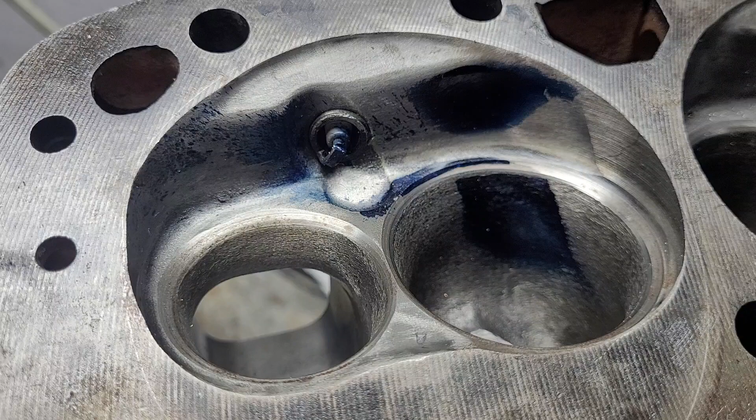Okay, take two on this, guys. For some reason, after I recorded it, it was gone. I don't know. I don't understand how.

We got a request for the Slover bow ties versus Charlie bow ties, or the old Chevelle bow ties. Unfortunately, both of the Slover bow ties did have some Charlie work done to them. You can see on the exhaust, around the bowl, I have some burr action.

Further down in the port, you see that mirror finish? That is Slover porting. As far as the intake bowl, that grinding is a minimum of 8 years old.

It's gone over with a cartridge roll. It looks pretty good. As far as liquid flow, it does a pretty decent job. Very, very similar to mine. Even though I have my chamber kicked out a little bit more, it looks pretty good.

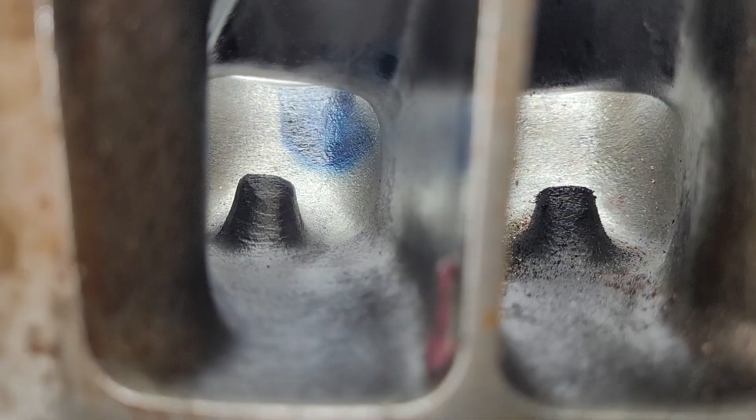Okay, you can see down the Slover bow tie where the liquid is. One thing I did notice about the Slover port is it's not quite as wide at the short side radius on the roof and the short side radius, it's a little narrower. It also poured a little bit smaller. These poured exactly 200 cc's.

Mine were 204. Okay, you see a little bit of clay by the bolt hole because it was broken through. I have the same thing on mine. The pinch is almost identical on both heads.

Okay, these are the Chevelle bow ties. They have a different shaped bowl. They are narrower in the mid-range, and then the roof gets wider.

The Slover ones are more like a triangle. They get narrower and narrower as they go down. Okay, because the roof isn't nearly as wide. So that's an important point. That's where those 4 cc's come out of. That and the width and the short side radius.

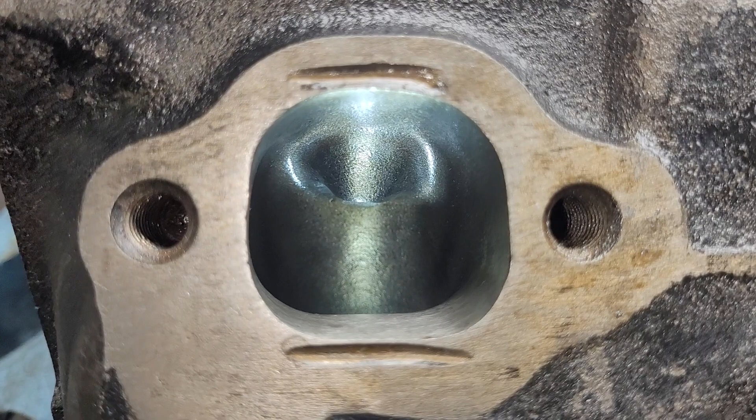As a comparison shot, these are my Chevelle bow ties. And they're shiny because I had to hit this with a little WD-40. Okay, the exhausts are radically different. And we're going to discuss the difference in the design quite a bit.

Now, these are my Chevelle bow ties. The shape at the flange is almost exactly stock. The way I usually like to do exhausts, I don't like them bigger than stock. I try to keep them relatively small.

But I take out way more width-wise on the port around the guide boss, where it's restricted by the valve stem. I give it more area than the Slover bow ties. Let's take a look at the Slovers.

Okay, the Slover bow ties have a completely different shape. They're an upside down D, basically. So the roof was raised considerably and made a lot wider. They also are much bigger. They're 65 cc's, and my Chevelle bow ties are 61.5.

So I remember when I saw these at the swap meet, I saw that exhaust shape, and I think there was an Australian manufacturer back then that was doing like an upside down D exhaust that were pro-something. But that company had a really good reputation. So I saw these and I'm like, well, maybe this guy knows something I don't. And I picked them up.

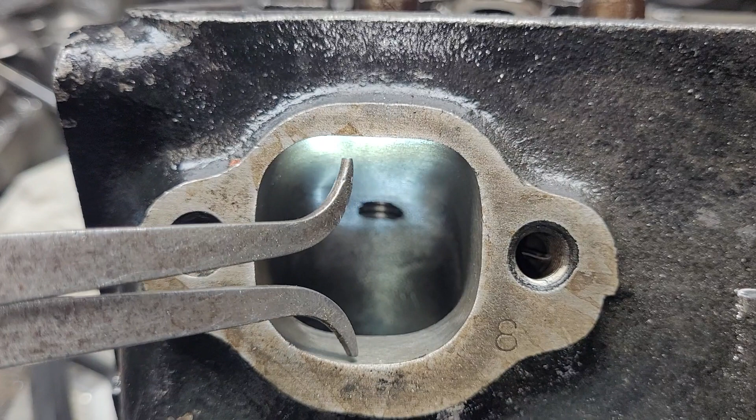That's how much taller it is. So the roof has been raised, and if you take a look at the floor, let's compare that floor to my old Chevelle heads.

Okay, that shape is dead stock. It's flat until it starts to curve into the vertical walls. I did not change that a bit. That's just the way GM cast it.

So what they wound up doing was they actually lowered the center of that floor, which I don't agree with, because as it is, that's the low speed area, and you don't want to make a low speed area bigger - you want to make it smaller, because you can cause a lot of reversion right there.

In fact, if you study fluid dynamics, if you have real high speed air on the top, which this is designed to do - that's why it's got all that area on the top - the real slow moving air could actually go back into the port. It doesn't sound right, but it's true.

So I think these were done like an oval track design. I think they were designed for higher RPM sustained use, and one of them actually had a crack and was welded, because the guide failed, so it couldn't get rid of the heat. It was probably sustained racing, and it couldn't get rid of the heat, and then it cracked and was welded. Whoever welded it did a really nice job - I don't have any problem with the way it was welded at all.

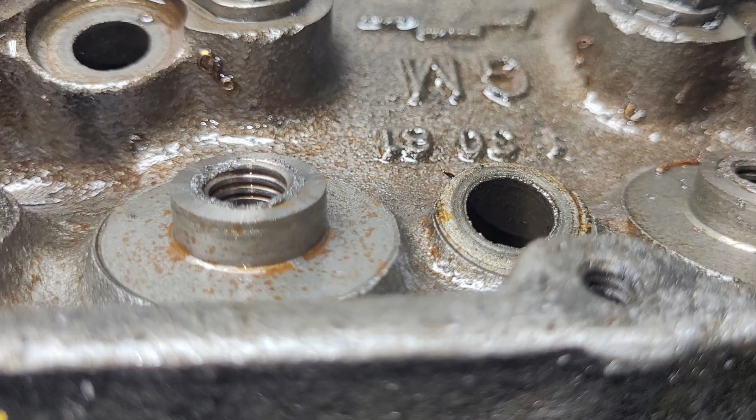Okay, you can see these actually have got - I put bronze in these. I did have problems with removing two of those spiral bronze guides, and I did break - I broke two of these off, and you can tell, they're threaded, so they're super thin. So when I was machining them out to put the thin wall bronze in there, they both snapped off. The rest of them are good to go, so there's no problem.

I don't really - I'll have to bring that to the machine shop, and you can put some cast iron guides in.

Okay, the Slover short side radius is relatively tall. It looks pretty good. It is cartridge rolled. Sorry, that's a light burr. I do believe it was cartridge rolled when I flowed it, though.

These have had - I think I did, did I do all of these? No, I only did that one port on these. Okay, the other head has had more work done to it.

Sorry, guys. All right, tough to see, but it does have a little bit different shape. This is laid back - it looks like a touch more. But due to the other head having welding on it, I'm going to leave those a little bit higher, I think.

When I do work on those exhaust ports, I'm going to work more on the width of the port than anything else, because they're already big. So I'm going to try to make the efficiency the best I can for what we've got.

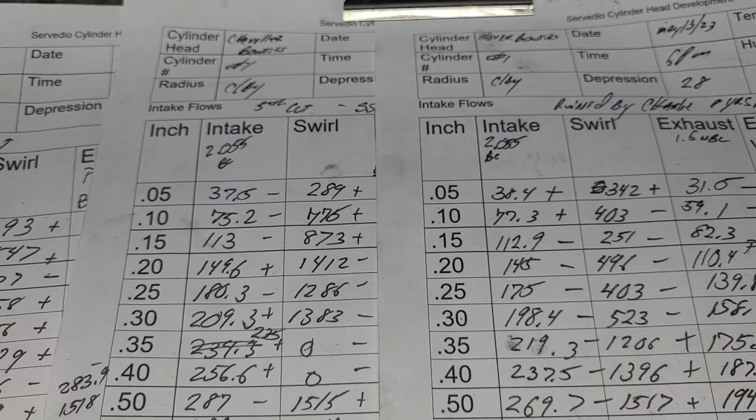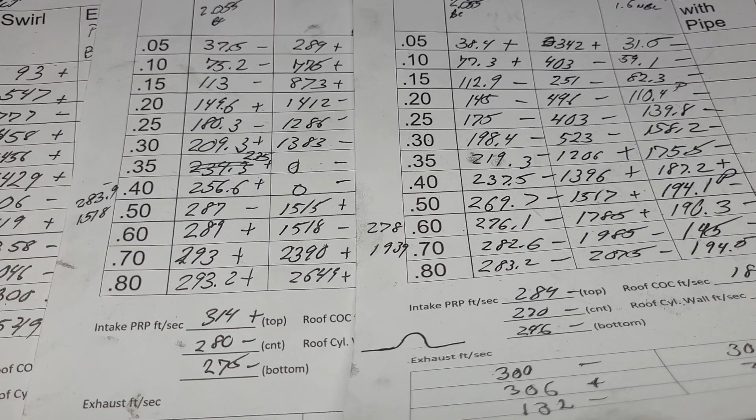Okay, on the left is the Chevelle Bowtie - that's the 5th cut on that. So 5th cut, I only did the intake because I was done with the exhaust on the 4th cut. I was happy with it.

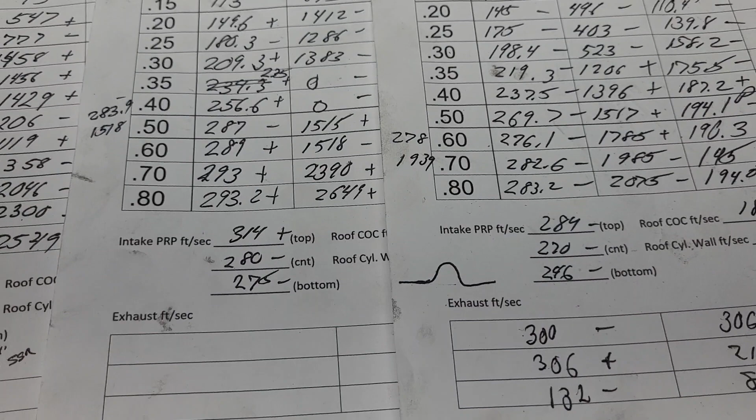And the 5th cut, all I did is try to even out the speeds on the short side radius, because I wasn't happy with how fast the short side radius was in that one spot. It's still quite fast in one spot.

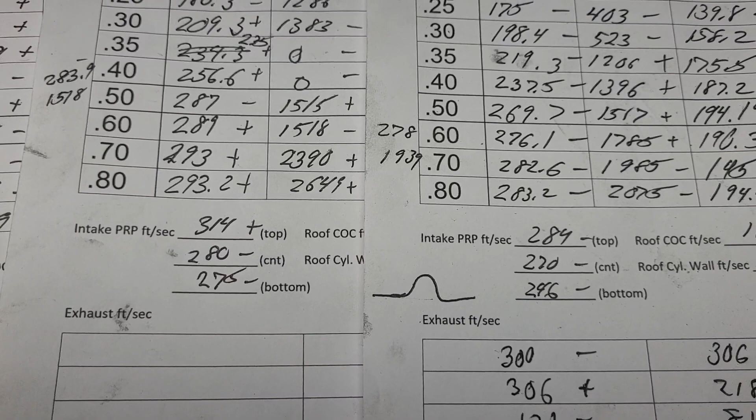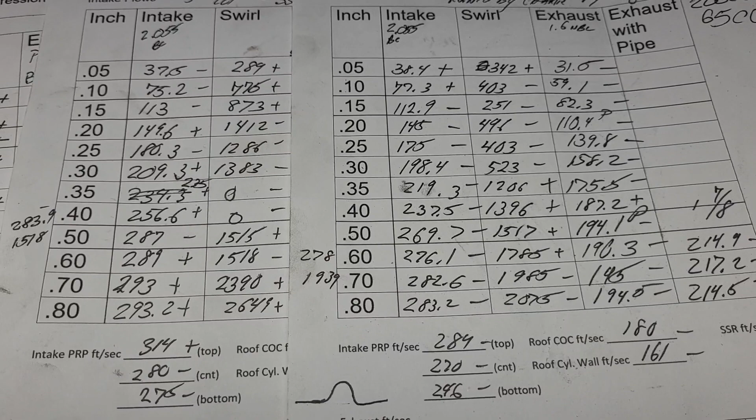Now that's one thing that I noticed, and sorry if I repeat myself, guys - that's what happens when you do 2 videos the same. The Slover port definitely isn't as wide across the top of the bowl, and the short side radius width is definitely less. I think I already mentioned that. But let's see how we did.

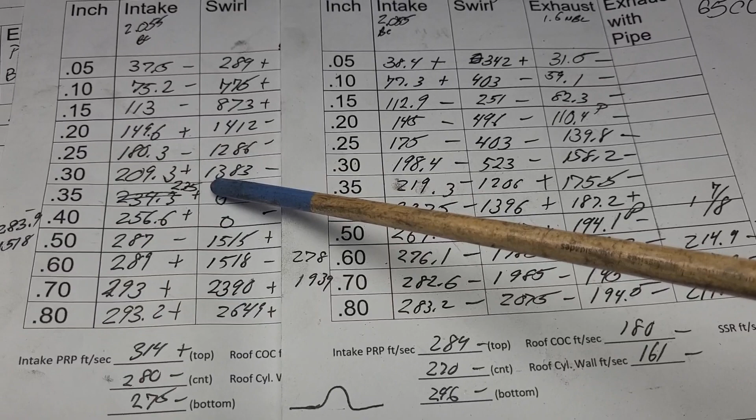Now these pluses and minuses here are in reference to these flows. Okay, so: Chevelle, Slover, ported - ruined by Charlie.

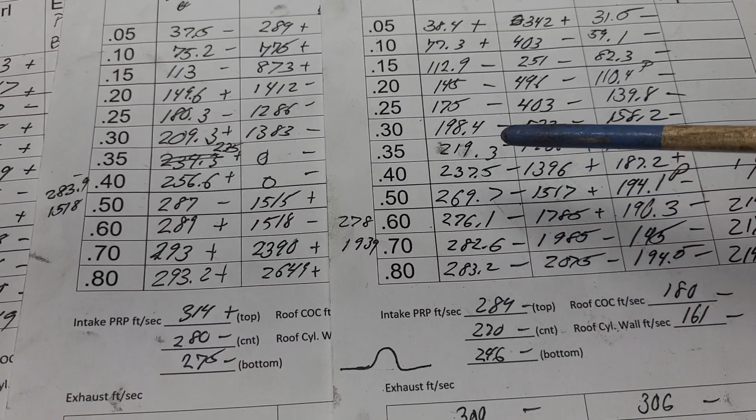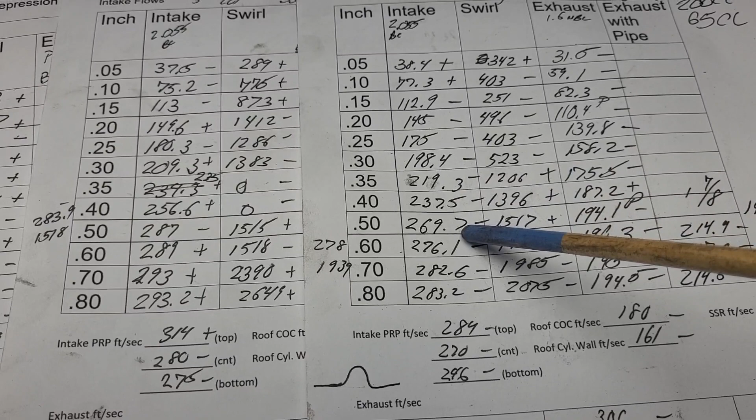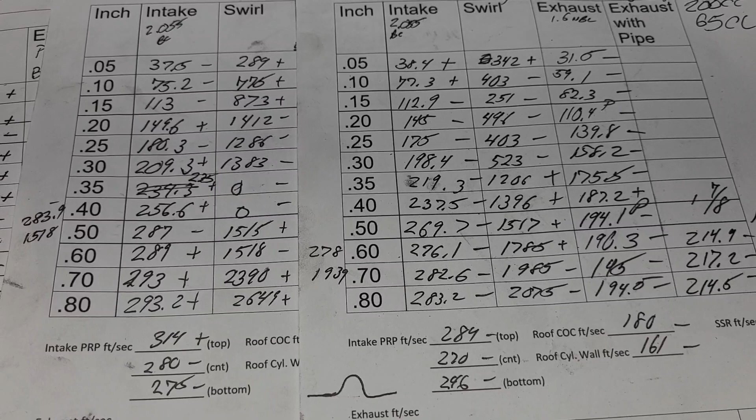Okay, plus, minus, minus, minus, minus. Now, not busting on Slover at all - if these were oval track heads, remember, they only flow about 230 stock, so a 40 CFM gain is huge. So they went up from about 185 cc to 200 and got 40 CFM extra flow. Not bad at all.

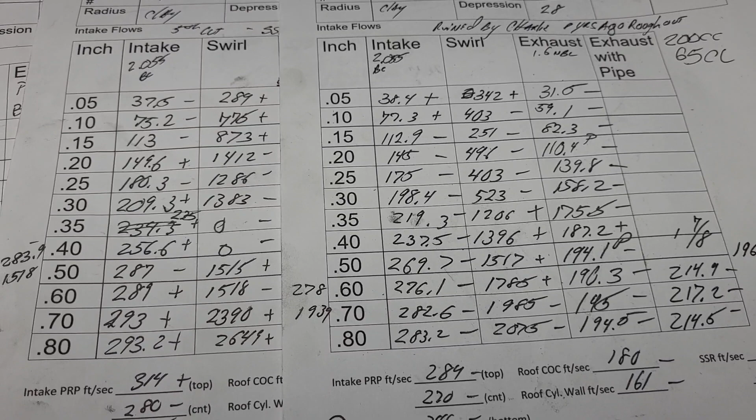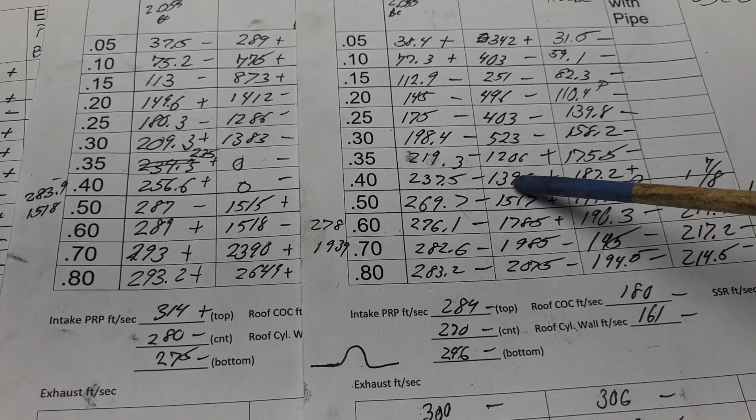Let's take a look at the swirl here. Plus, minus, minus, minus, plus, plus, plus, minus, minus, minus. The swirl is still pretty good, right around the area where you'd be racing, fine. Not really a problem.

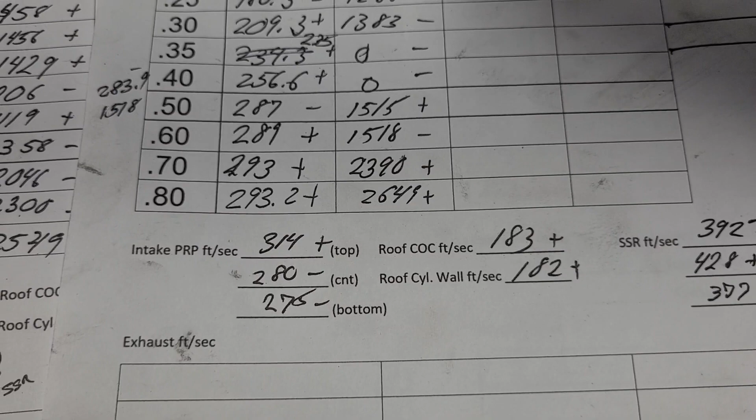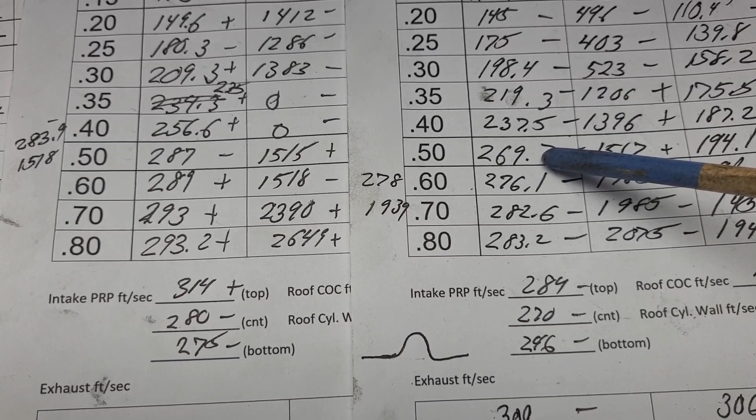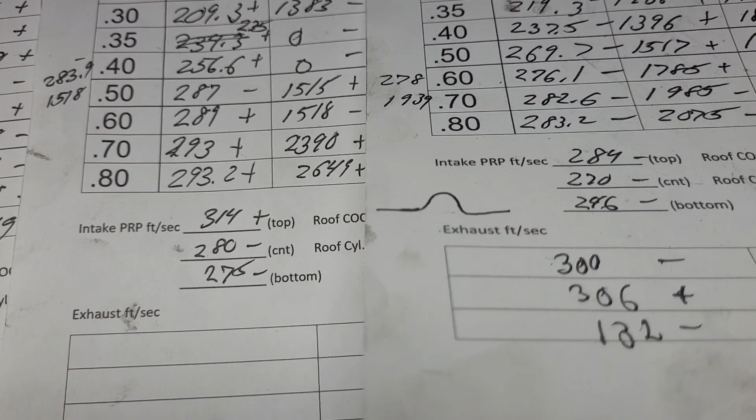Let's take a look at the air speeds on the intake. Push rod pinch was measured at 0.567, minus, minus, minus, because it flows a little bit less. It flows 278, this is 283.9. The pinch, I said, was almost identical in size. Roof, 183, 182. A little bit slower on the cylinder wall side.

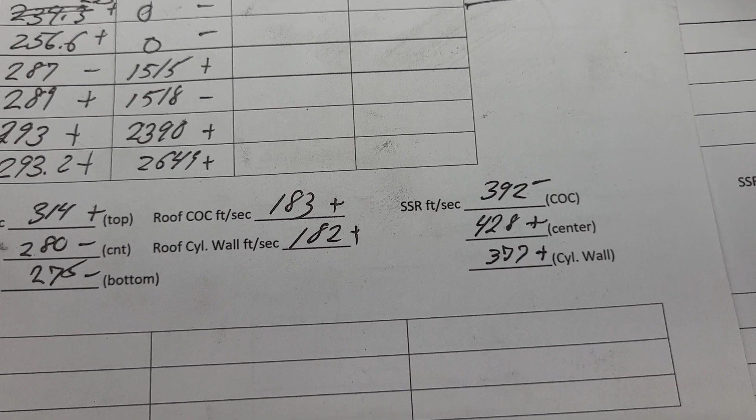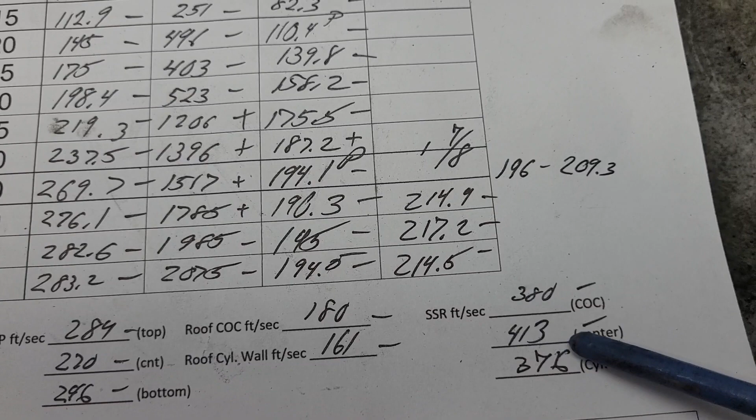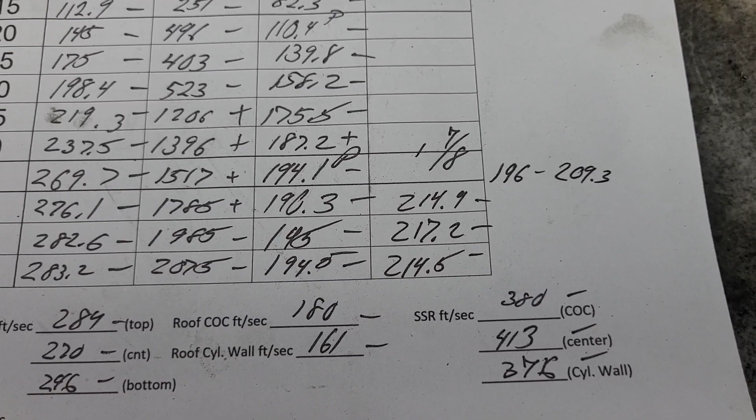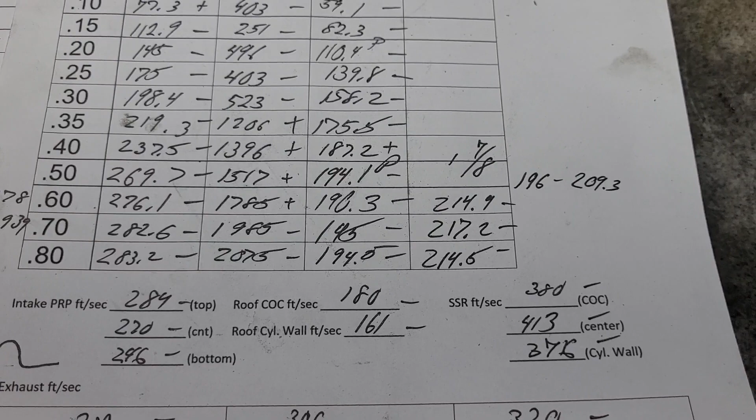Short side radius numbers. Minus, minus, minus - now think about that. It's a narrower short side radius. They're almost identical in height, so the only thing really different, the short side radius on the intakes, is the width. This is definitely a narrower short side radius. You would think the speeds would be up more, but it doesn't always work that way, right? Because you make it wider, it makes more air want to go around it, take the shortest path, increases the speeds. So you have to test, right?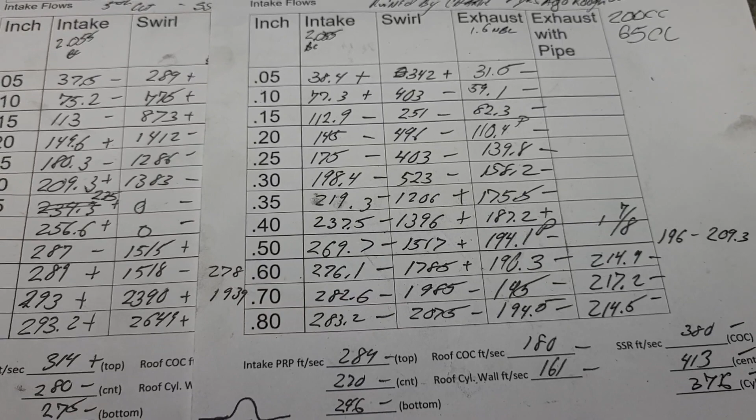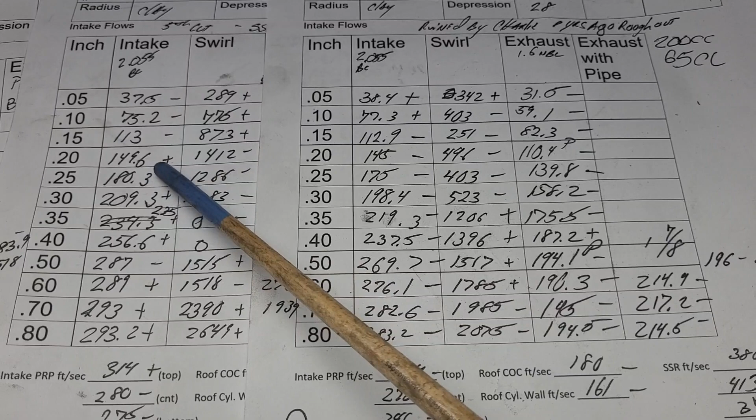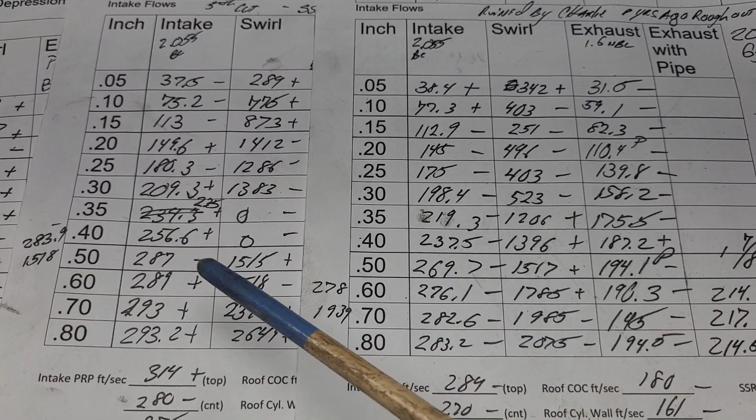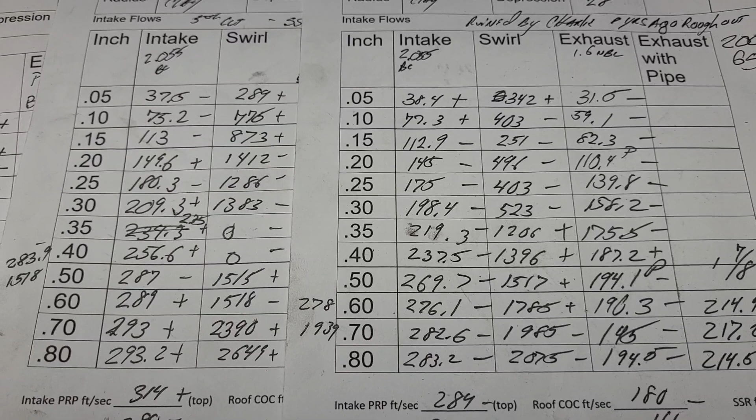Okay, let's take a look. We should take a look at a couple flows. At 200, we're 149.6, 145, close. At 300, we're 209.3, 198.4. At 500, 287, 269, and we top out at 293, 282. 282 is not a bad number - that's all these flowed before with the 90s porting. That's all they flowed, was around 280, 282. And like I said, these were probably oval track, so you know it could have quite a bit of lift on them.

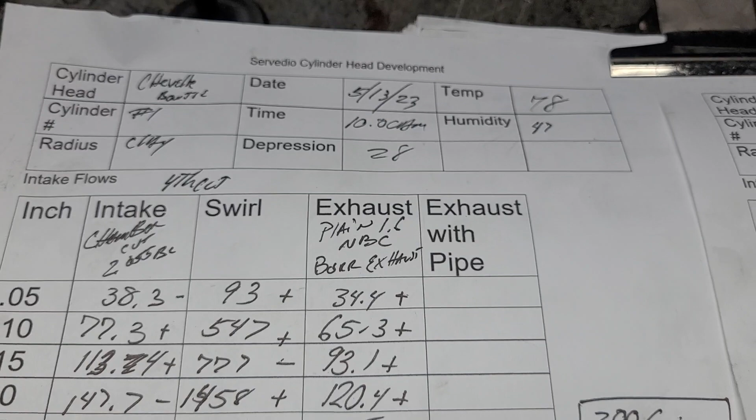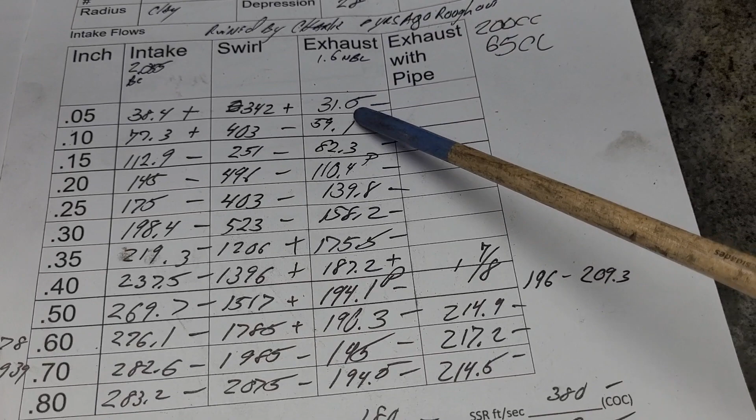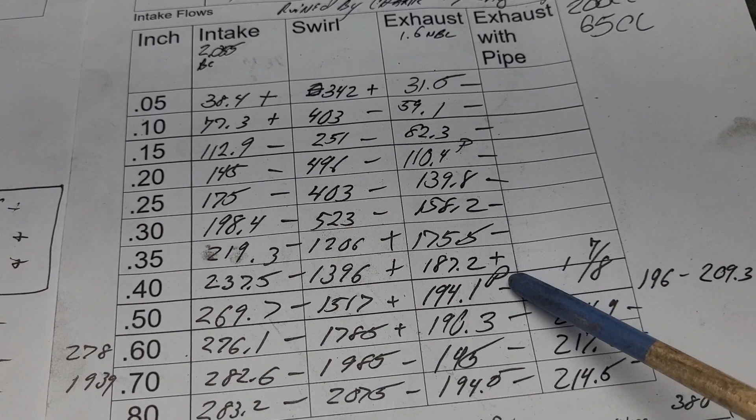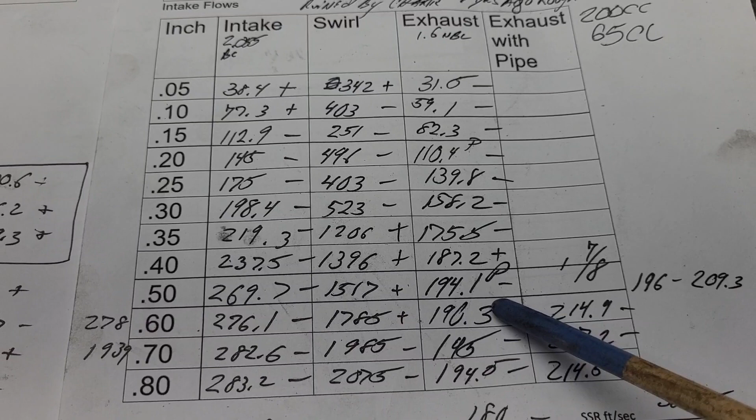Okay, this page is Chevelle Bowtie 4th cut, because that's when I finished up my development on the exhaust flow. So we're going to compare these flows to these flows - these pluses and minuses here are in reference to these. How do we do? Minus, minus, minus, minus, minus. Plus, minus with a P, pulsating - pulsating's not good. It's literally a sound on the bench where you can hear it's starting to separate.

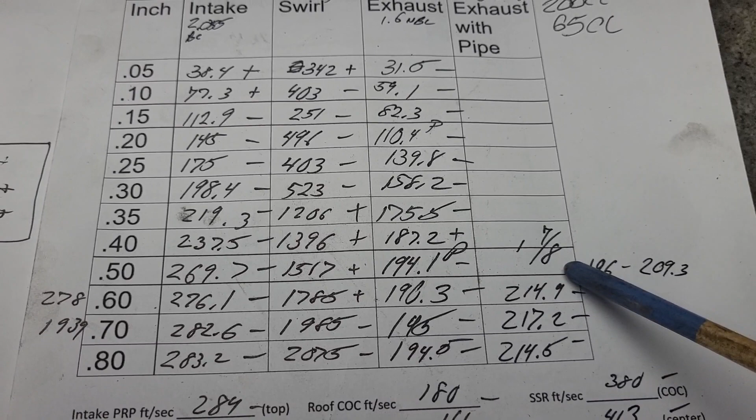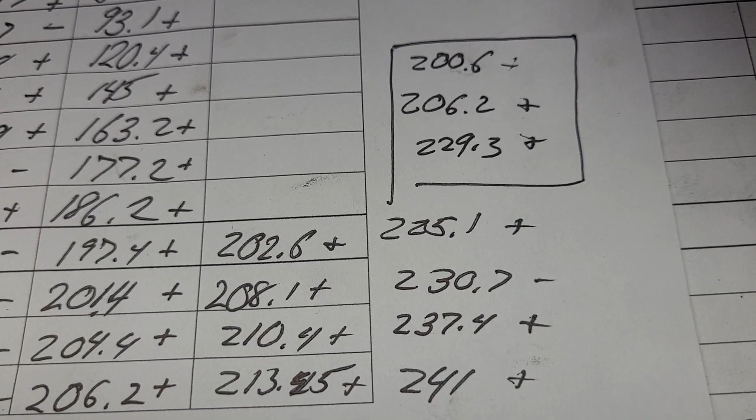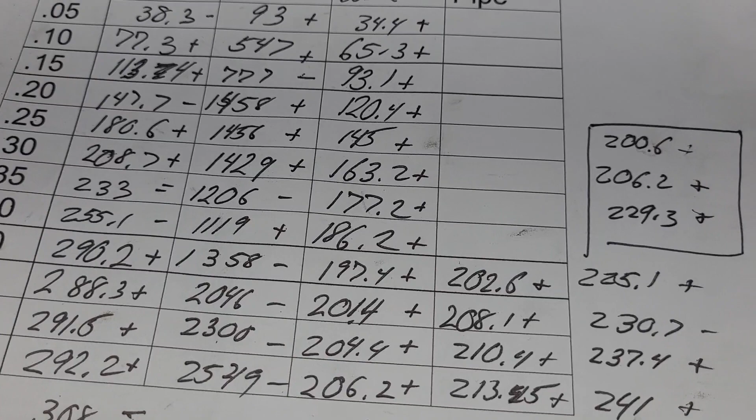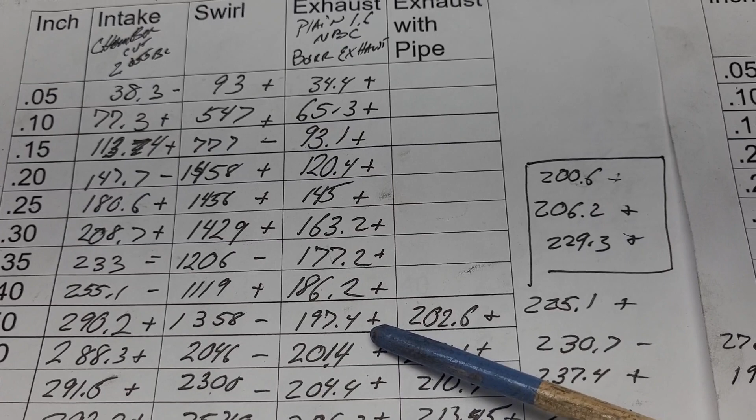Minus, minus, minus - couldn't use the small pipe on here because the port's too big, so I had to use the big pipe. So if you compare the big pipe numbers to the big pipe numbers here, 225.1, 230.7, 237.4, 241. That's a big difference. And the really important part to that is not that it flows that much more, but it does flow a little more, and it's a smaller port, guys. Now, if you're running something really high RPM, that's when you may want the exhaust more like this. But this was street design, so I think this will work better for a street application.

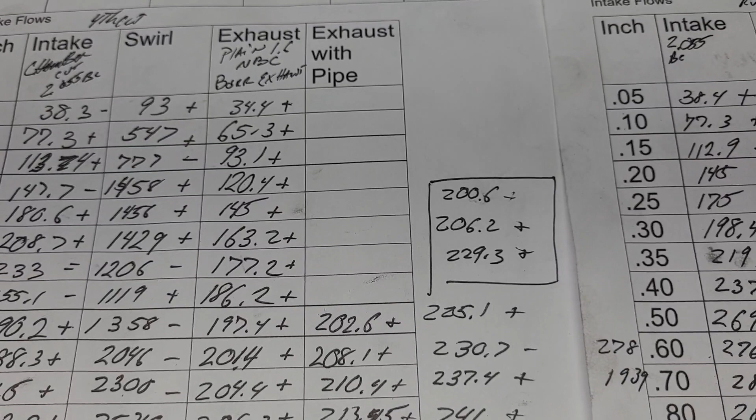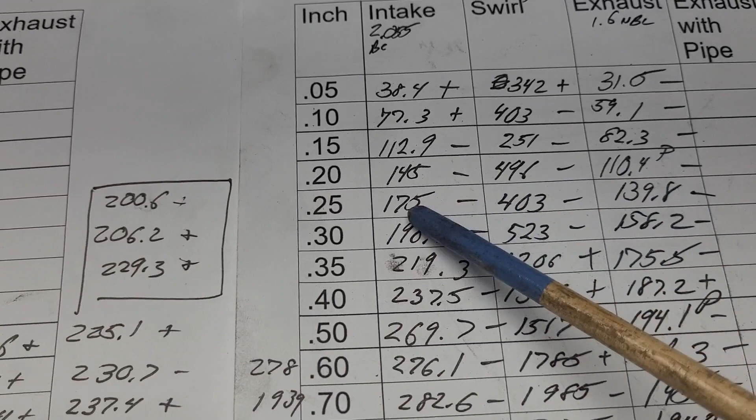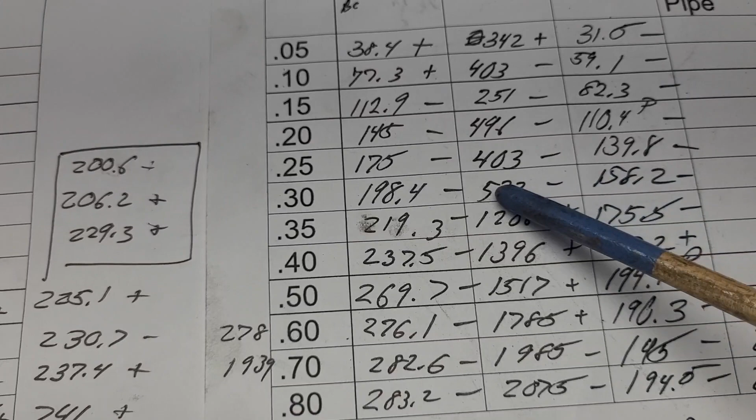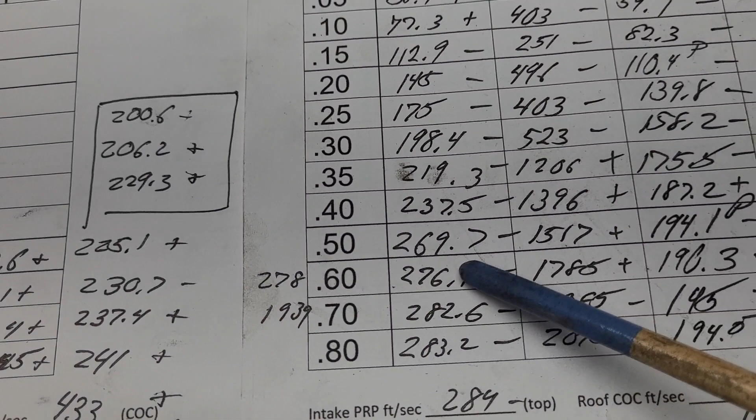Let's compare some numbers. Let's go 200 thousandths: 120, 200 thousandths, 110 with a pulsation. 300: 163.2, 158.2. 500. Now let's go 600: 201.4, 190.

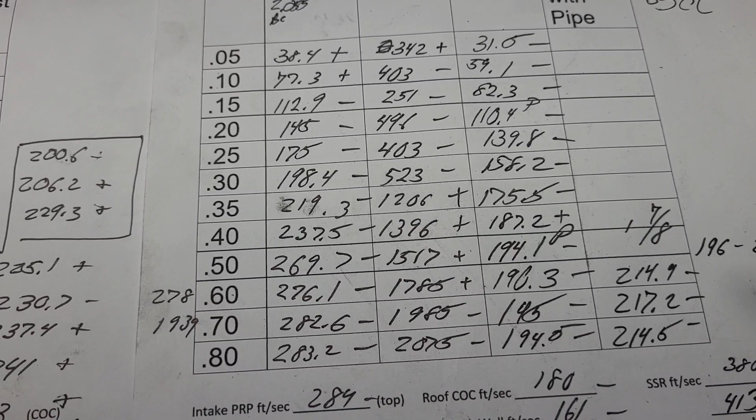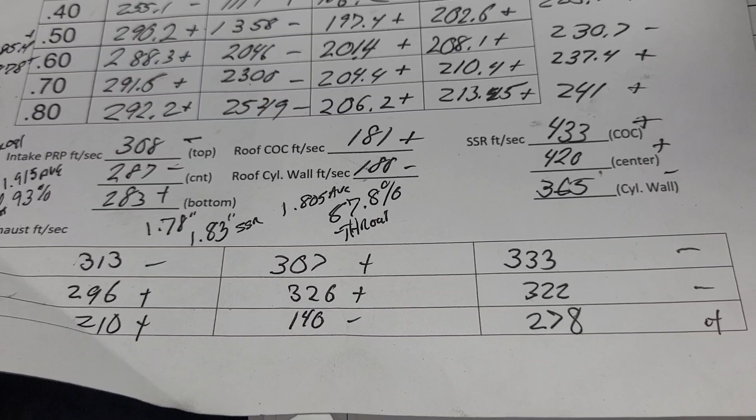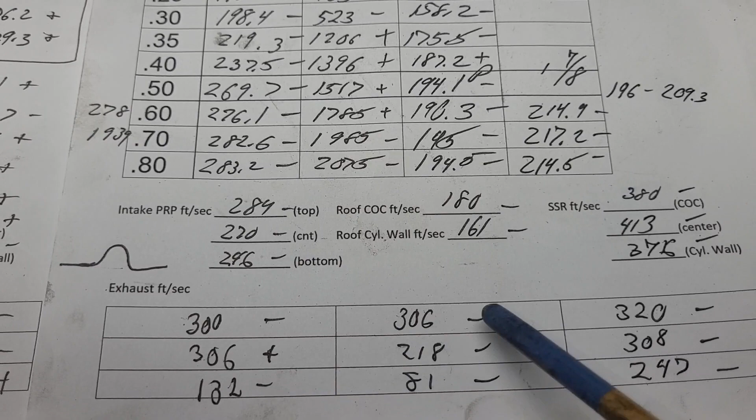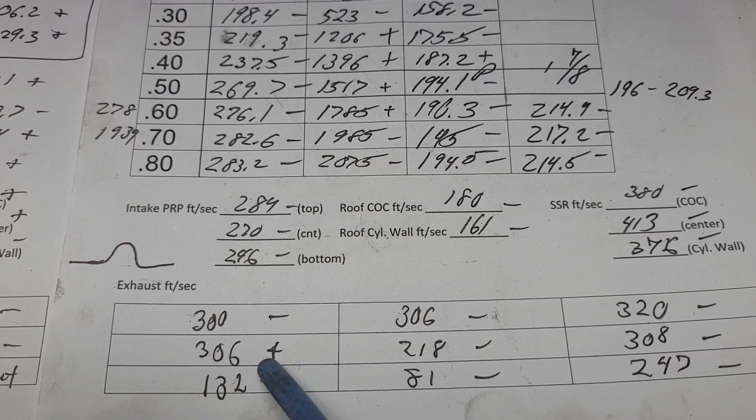Let's take a look at our exhaust speeds and see if we can figure out where that extra efficiency comes from. So these were the air speeds on my Chevelle Bowtie heads, and these pluses and minuses are in reference to that. Minus, plus, minus, minus, minus, minus, minus, minus, minus. It's a bigger port that flows less, so what should the air speeds do? Go down. The only spot it went up was right here, and it went from 296 to 306.

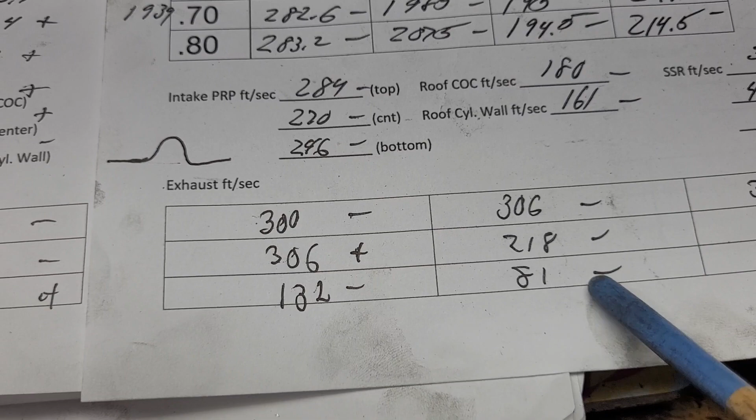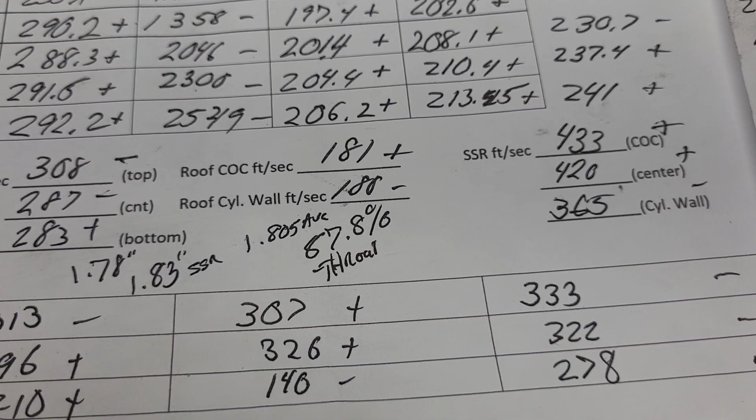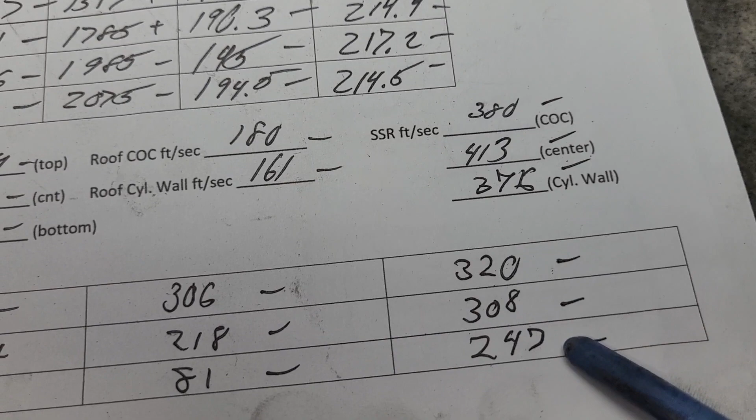Okay, the important points to look at: completely dead at the center, 146 to 81. Take a step up, 218, 326 - huge difference. This corner, 210, 132. 278, 247. These air speeds are much better, which is why it works better. It's more efficient.

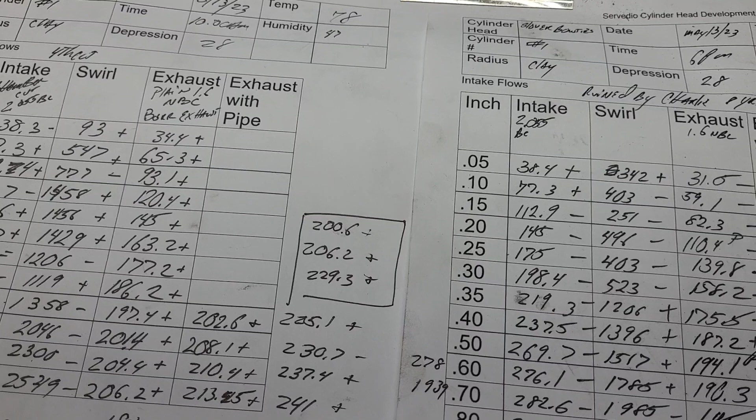Now, hold on a second. Okay, to look at our exhaust again, right? Now, what they did is they lowered that floor. So what they did is they took an already low speed area and gave it more area.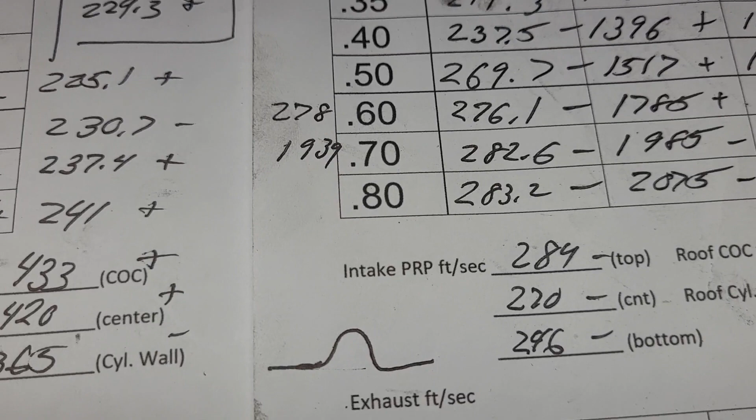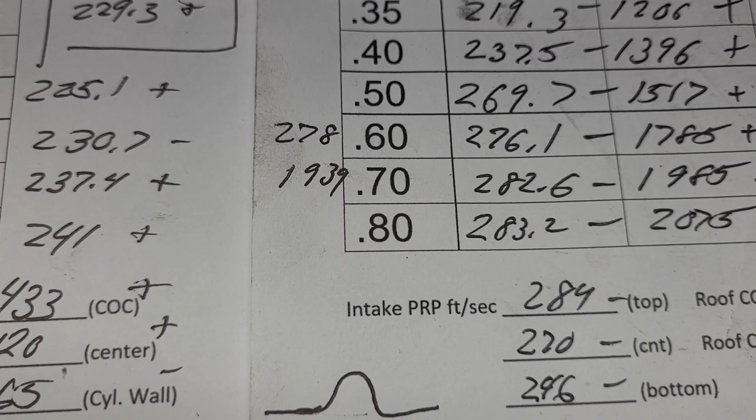I talked to the older guy from High Velocity Heads at PRI one year, and I asked him, why'd you put the fin in that port? What does the fin do? He goes, it does absolutely nothing. And I giggled. And he goes, I actually did it because I wanted to see how many people would copy my design next year, and a lot of people did.

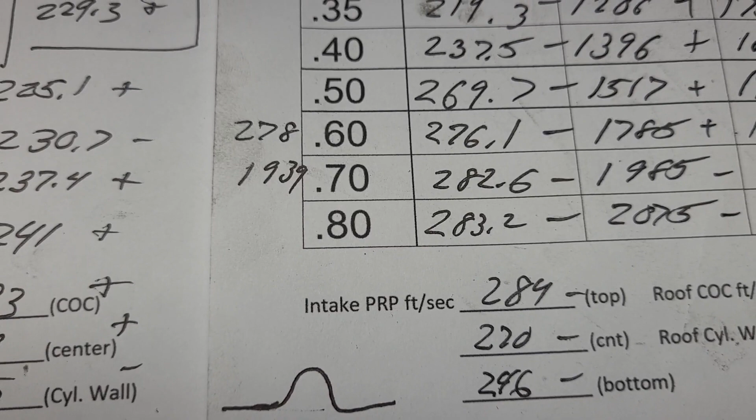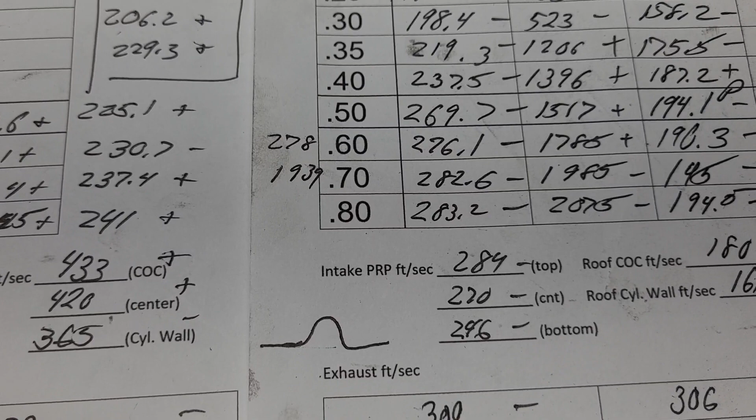But in reality, he just wasn't telling me that he was reducing that low-speed area right there, which is actually good engineering. I like it. And I don't really expect to get a straight answer either. It's fine.

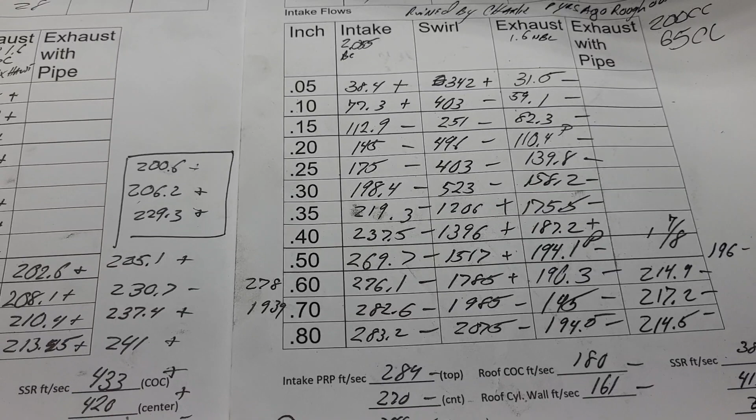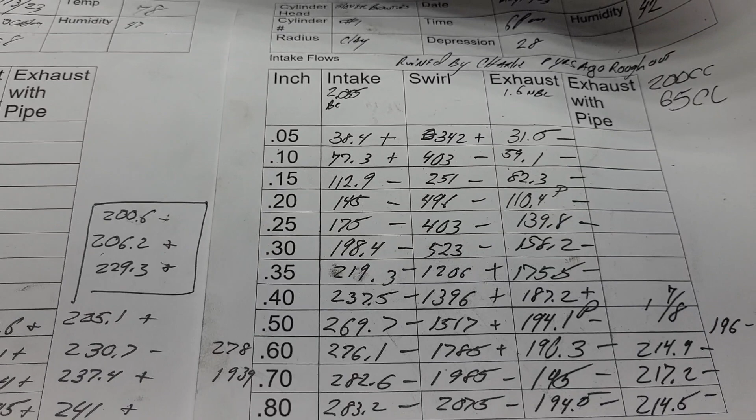So, not knocking on Slover. Overall, they make good power. You have to remember, Charlie did some work on them, so they may have made a lot better flow before Charlie touched them. It's possible. I do remember I took some metal out of the throat on both of them,

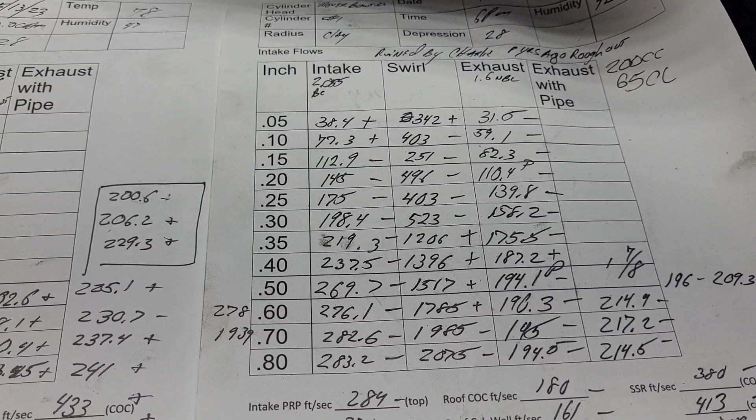which I wouldn't do today. I would have kept it tighter. But we'll see. I'm going to do some work to these, and we're going to see if we can get that efficiency up.

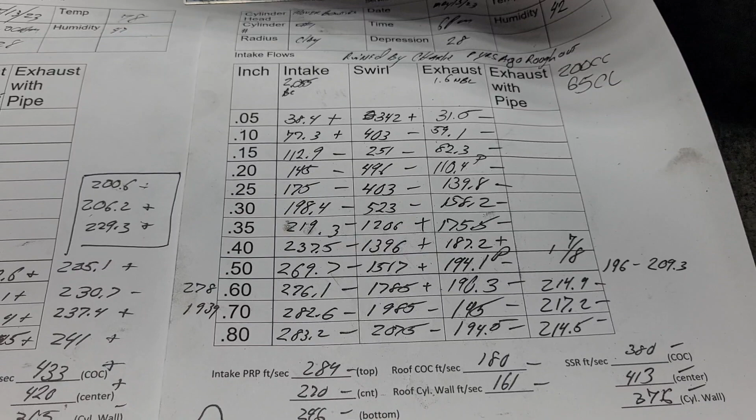I think they're worth saving, even though one of them was welded. Let me show you the welded spot.

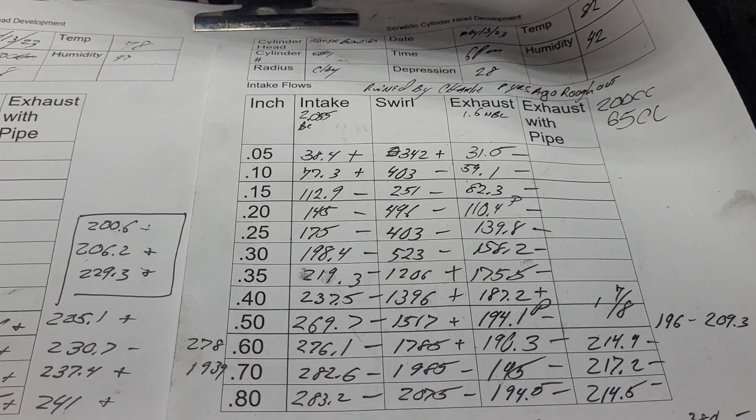Okay, you can see I did some work on that. I wasn't thrilled with that little carbon crunch pocket. Right, that's what it should look like. This was welded, but it had a little crack from here into the exhaust. You can see they did a nice job on the exhaust. You can hardly even see it was welded.

But what I think happened was the guide failed. That's the only one with an iron guide in it. So what I think happened is it was high speed, endurance racing, and the guide went away and overheated it and cracked it there. So...

Like I said, I don't have a problem running a welded head as long as it's done well. And I'm going to make sure it stays thick, so probably I'll never have a problem again.

They may have been, I think the Slovers were angle milled, to be honest. I think my bow ties were flat milled, because you start measuring thicknesses like the bottom of the port or the bottom to the water jacket there, and the Slovers are higher on the water jacket, but yet are much thinner on the other side of the head. So yeah, I'd have to put them on a block and see.

Oh, that's another point. If they were angle milled, they would have had to change this face angle here. That would make that port a little bit smaller, wouldn't it? It's an interesting point. I mean, if you're going to compare CCs, that makes a difference. Is it going to make a huge difference? No, probably half a cc. But it still makes a difference.

Remember, those were only 200. Mine were 204. The Slover exhausts were 65. The Chevelle exhausts were 61.5.